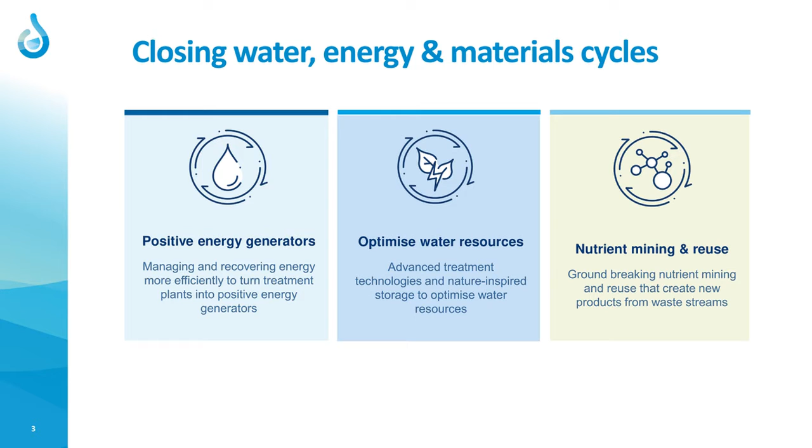And since this is a project on the circular economy, what we try to establish is further linkages between the water sector and other sectors in the economy. And that's easier said than done, to be honest. But so we look at not only how can you recover water, energy, and nutrients, but also how can you link these resources to industry, to new urban developments, to the energy sector, and to agriculture.

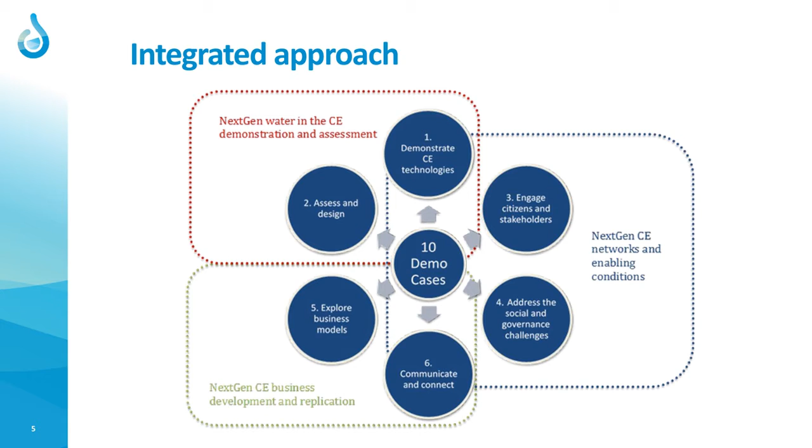Now, why is this important to take this integrated approach? I think that is maybe the main challenge in going to circular water solutions, to take this integrated approach and also to connect to other sectors. So this requires that we not only look at technologies, which are good, demonstrated and innovative, reliable, but also whether these technologies are safe and sustainable.

It's important to have proper engagement of stakeholders and social acceptance. We also need to look at the right governance arrangements and supportive regulations. And again, we have to develop new business arrangements. So I will look in these 4 conditions one by one in this presentation. Let's start with the technologies. So you can see here a list of technologies demonstrated at 5 of the demo cases.

And of course, it's important that these technologies are demonstrated at large scale to show that these are feasible and reliable. So to start in Braunschweig, for example, we look at sludge hydrolysis and energy recovery. In Costa Brava in Spain, we use regenerated RO membranes for membrane filtration for water reuse.

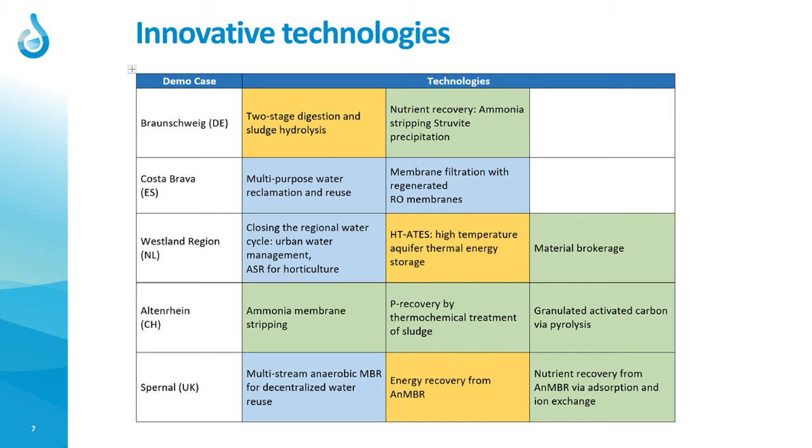In the Westland region in the Netherlands, which is a horticulture area, we, for example, look at high temperature aquifer thermal energy storage. Later this morning, my NEXTGEN partner, Anders, will present work done in Altenrhein, in Switzerland, on nutrients and material recovery. And finally, at the bottom in Spernal in the UK, you can see that we focus on anaerobic MBR systems.

At the other 5 demo cases, La Trappe, which is a beer brewery in the Netherlands, we look at a plant root-based treatment facility for reuse of the wastewater of the beer factory, for example, for washing the bottles of the beer brewery. In Gotland, which is an island in Sweden, we look at rainwater harvesting. In Athens, I will explain a bit more in a few minutes, we look at sewer mining.

In Filton Airfield, that's an old airfield in Filton, which is being developed into a new neighborhood, we will demonstrate all kinds of circular water solutions for this new neighborhood. And finally, in Timișoara, Romania, our new demo case, we will look at sludge management and reuse.

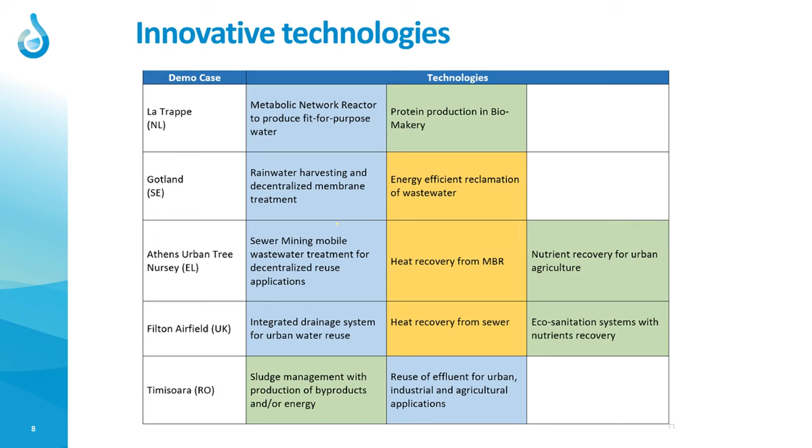And after my presentation, our colleagues of Aquatim will present this new, very interesting demo case in Romania, where we will work together with Aquatim and also the business development group at recovery of byproducts and energy from sludge, and also a feasibility study on the reuse of effluent. So you can hear more about this demo case in 20 minutes.

I wanted to show one of the other demo cases, what we are doing there. This is the demo case in Athens, where we demonstrate a sewer mining modular unit. And the idea here is that we recover wastewater from the sewer to be used for an urban tree nursery, for urban green irrigation. Here on the top right, you can see a picture of the tree nursery, a green area, and it is green because it needs quite a lot of irrigation water, and that water comes from the sewer line. And at the same time, we also co-compost sludge and the green waste here.

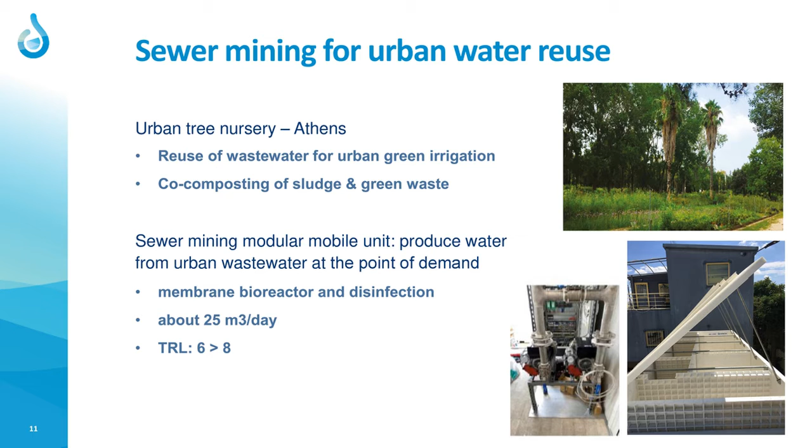This is a good example for all cities in Europe who have challenges related to climate change and limited water resources, where you can use wastewater as a source for urban green irrigation.

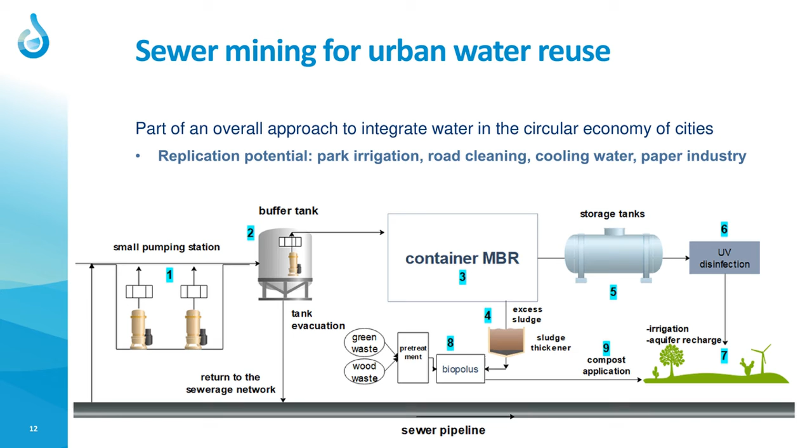Now, secondly, these technologies obviously need to be sustainable and safe. So we put quite a lot of emphasis in our project to develop and apply tools to show that indeed these technologies contribute to a more circular economy. So we do energy assessments, we do life cycle assessments. Very important, we look at the carbon footprint. At the same time, we also look at possible health risks related to, for example, reuse of water. So we look at microbiological and chemical risk assessment methodologies so that there's no accumulation of contaminants.

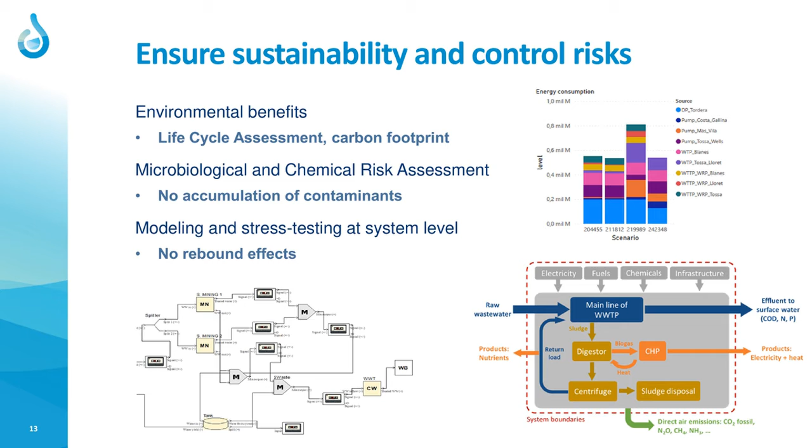And finally, we also model these technologies at system level. It's really important that you show sustainability improvement across the whole circular economy, and that you not only focus on your own sustainability improvement, but have this at the system level. And for that, we apply a number of modeling tools. Now then, as you might know, really, really important is that you have proper engagement of all stakeholders involved from the start of your initiative.

And we have developed a number of approaches to secure this stakeholder engagement. We work with communities of practice, and for the general public, we do outreach activities and use serious games and augmented reality applications. And a key element in this engagement approach is that we have to build trust. Not only trust within the technology or the reuse or whatever activity, but very much also trust in the involved organizations for both water industry and governmental organizations.

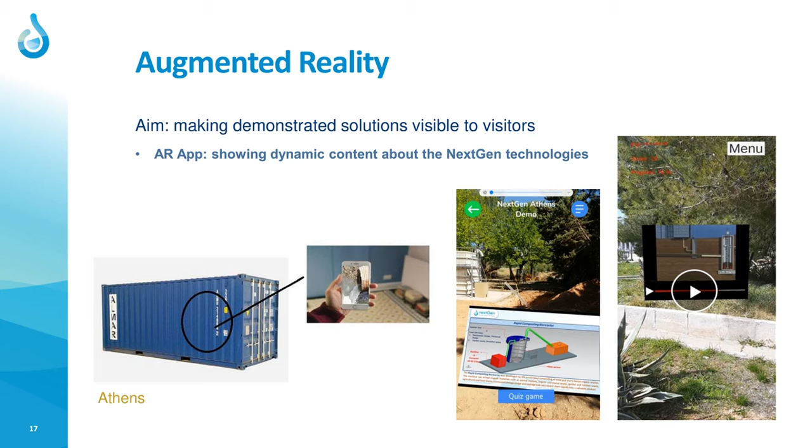Another important element we look for in this project, and which is needed to have successful circular water solutions, is that you have supportive governance. That means because we are working across scales and sectors, you have to look for hybrid governance structures which balance between both strict regulations for health, safety, and on the other hand, also supportive measures.

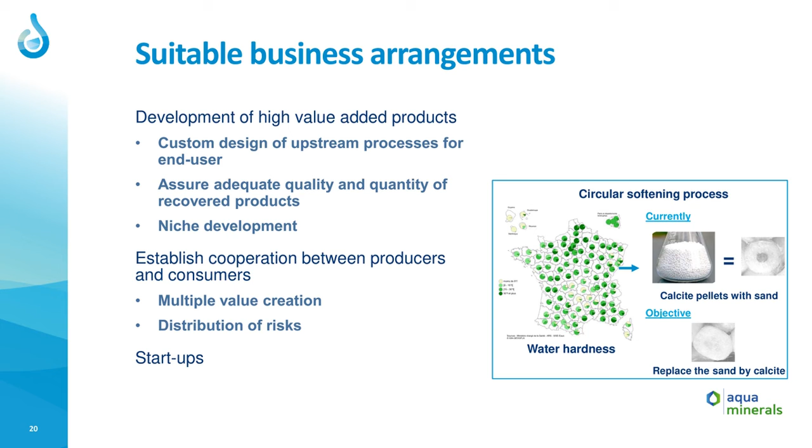As it is a circular economy project, we are also developing an online marketplace. At this online marketplace, we put all our technologies from NextGen, but also from other projects. And people interested, the market, could search in this marketplace for these new technologies. They could arrange meetings and look for sellers.

Well, this will be, let's say, an online database, but we are linking this online activity to face-to-face activities. Once COVID is over again, these face-to-face activities are organized by Water Europe, also presented yesterday. So Water Europe organizes Water Market Europe, business-to-business meetings, and we will facilitate these meetings with this online marketplace.

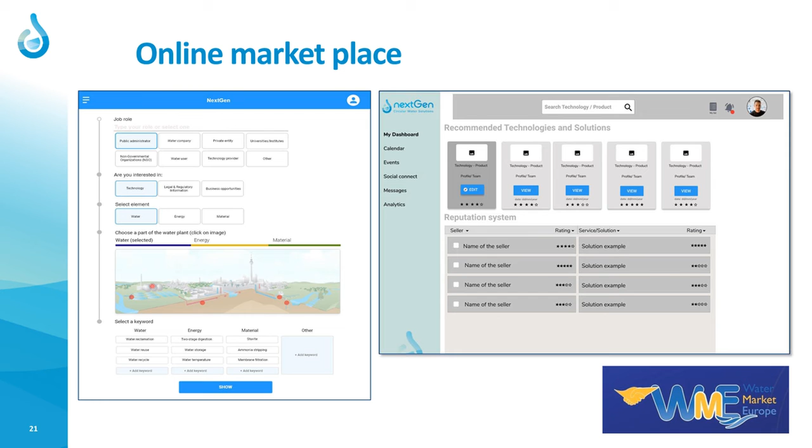And finally, a key objective and challenge for any circular initiative is to connect to the other sectors, because we are establishing codependence between, for example, water and agriculture. And what can help in this connection is to invest in further digitalization of our processes, to look for symbiotic elements. And obviously, it's important that we share and learn from each other, to communicate. So that's why I'm also quite happy to be in this interesting conference of Aqua Circular, to share our experience and to learn from your experience.

So that was what I wanted to present as a brief introduction to our project NextGen. Please have a look for further information at our website, but also stay at this conference for the next two interesting presentations of the demo cases in Timisoara and Switzerland. Okay. Thank you very much.